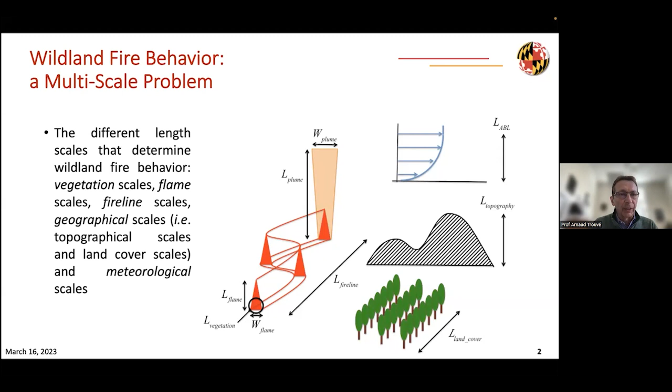So it's a multi-scale problem, and here I'm going to focus on the scales relevant to combustion engineering: the scales of the vegetation and the scale of the flame.

Computational modeling has the potential to describe physical phenomena at any of these scales, but typically, because of limited computer power, any given computational solver is specific to a certain range of scales. We differentiate between combustion solvers that resolve dynamics at the vegetation and flame scales, wildfire solvers that resolve dynamics at the fire line and geographical scales at kilometer size, and atmospheric boundary layer solvers that resolve dynamics at the mesoscales of the atmospheric boundary layer.

Here I'm going to focus on OpenFOAM as a combustion solver that looks at the problem at scales relevant to the vegetation and the flame, roughly speaking, meter scale.

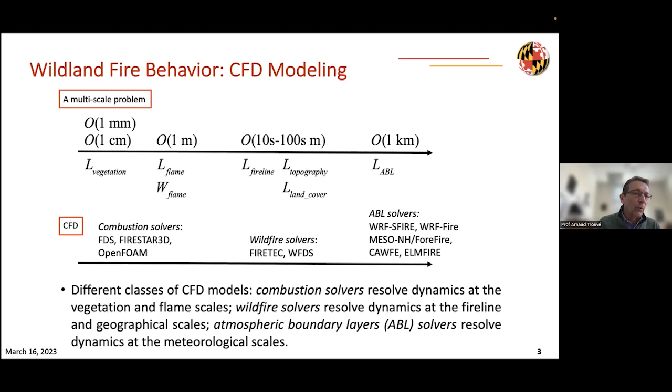As an introduction, I want to review the basic steps associated with flame spread physics. Flame spread can be understood as a repeated cycle of: first, heating of the unburned solid fuel; second, the production of flammable vapors as a result of thermal degradation taking place inside the solid vegetation biomass; and third, combustion of the flammable vapors in the flaming mode in the gas phase.

In this description, pyrolysis is the production of flammable vapors due to thermal degradation of solid fuel. Ignition describes either the start of pyrolysis or the start of combustion, but I'll come back to that topic in a few slides—basically these are the same.

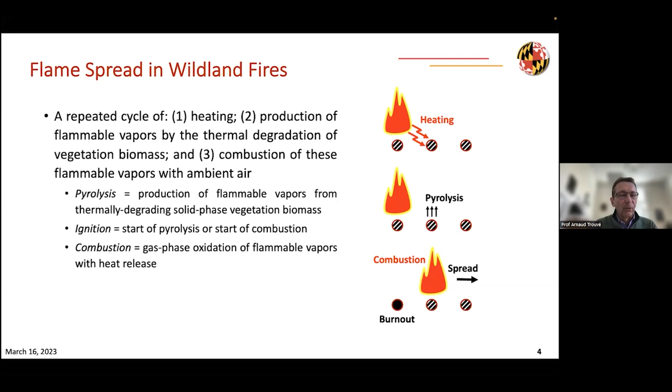Combustion usually means homogeneous exothermic oxidation of flammable vapors in the gas phase and in the presence of a flame. But actually, in the next slide, I'm going to indicate that the combustion process is more complex in wildland fires.

So we have basically two combustion modes. There is a flaming combustion mode that corresponds to homogeneous gas phase reaction and takes the form of a usual non-premixed, buoyancy-driven turbulent flame. But we also have, in addition to this, a non-flaming combustion mode called glowing combustion or smoldering combustion. That is the combustion mode we are familiar with because of burning fire logs in the fireplace or burning charcoal in a barbecue. It corresponds to heterogeneous solid-gas combustion where the fuel remains in solid form.

So in a wildland fire problem, we have both flaming and smoldering combustion that are relevant to the problem, and I will come back to that. That's one of the objectives of our simulations, to be able to describe both modes of combustion.

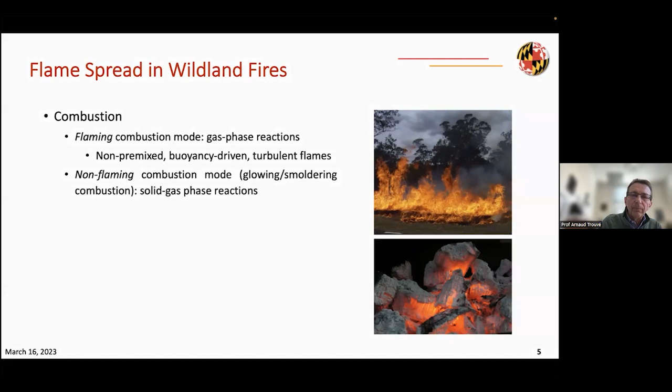So as I said, the first step of flame spread is a step in which the unburned solid vegetation is heated by the surrounding flame. This heating process takes place in the form of radiative heat transfer, convective heat transfer, or the transport of firebrands. Now, firebrands are of interest to this problem, but I'm going to stay away from that.

Firebrands designate the fact that small solid particles can break off from burning biomass. When they break off, if they are small enough, they can be transported by the fire plume and the ambient wind to a distant location and start secondary fires there. This is definitely a phenomenon responsible for fire spread under some circumstances, and is of interest to the community, but I will stay away from that problem here and focus on fire spread due to radiative or convective heat transfer.

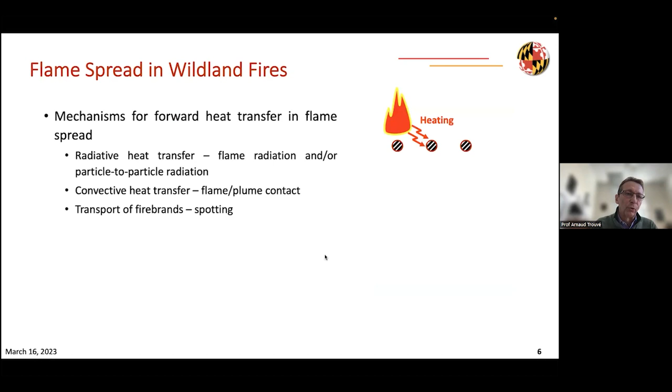So if we focus on fire spread due to radiative or convective heat transfer, one key quantity to understand the thermal loading of solid particle surfaces by surrounding hot gases is the expression you have here, where you have basically the heat flux to an assumed solid surface as a convective component and a radiative component.

The parameters of that heat flux are the local temperature of the gas, the convective heat transfer coefficient that depends on the local flow velocity as well as the local shape and dimension of the solid particle representing biomass vegetation, and the incoming radiative heat flux, called capital G here, which represents the heat loading due to radiation, also called irradiation. So all these external properties from the gas are relevant to understanding heat transfer to the solid particles, and I will come back to that.

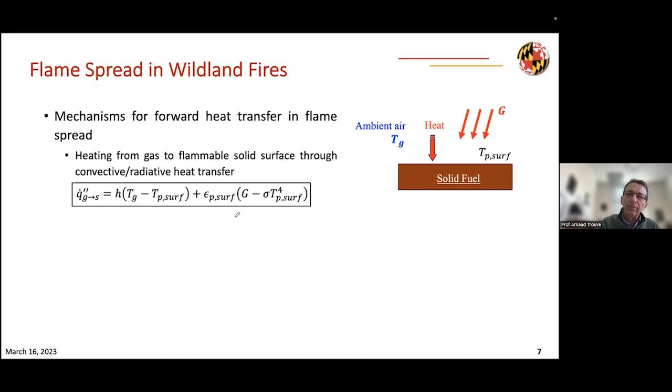So in the second step of a flame spread cycle, once the solid biomass fuel has been heated, it's going to start producing flammable vapors, and these flammable vapors are going to burn in the third step. So this is part of an ignition sequence.

This ignition sequence has several steps. The first step is the heating of the solid material. The second step is the start of pyrolysis, the production of flammable vapors. This is a phase change, and that phase change starts occurring at temperatures typically of about 300 degrees Celsius.

Then finally, these flammable vapors are going to mix with ambient air and start igniting through chemical reactions that take place in the gas phase. The details of that depend on the exact configuration, so I will not go into these details here. Finally, after ignition of the flammable vapors in the gas phase, you may have transition to a sustained diffusion flame around the biomass.

It turns out that many of these steps are relatively fast, and the rate-limiting step is the first one, the heating of the solid material. That explains why when we look at ignition, meaning ignition of a flame, we can really call it the start of pyrolysis. The rate-limiting step is the heating of the solid and the start of the phase change that takes place inside the solid particle.

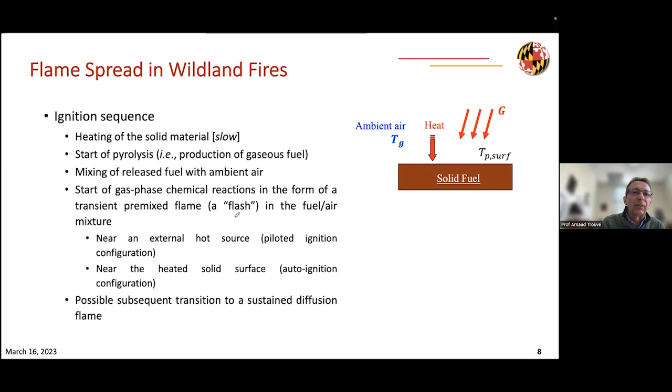Once you start pyrolyzing, the intensity of the pyrolysis process is a direct function of the intensity of what we call the thermal feedback, or the gas-to-particle heat transfer.

To understand what controls the rate of formation of flammable vapors, it is useful to do an analogy with evaporation of liquids. A simple model consists in writing that the fuel mass evaporation rate, in units of kilogram per second per meter square of exposed liquid surface area, can be written as the ratio of the net heat flux to the liquid surface divided by the heat of evaporation of the liquid.

Similarly, as a simple model to understand pyrolysis processes, we can write that the mass rate of evaporation of the flammable vapors produced by thermal degradation of a solid fuel is equal to the net heat flux coming from the gas phase to the solid phase, divided by the heat of pyrolysis, which is a semi-empirical quantity characterizing the heat required, in joules per kilogram of flammable vapors produced.

This model is not quantitatively accurate, so you need more elaborate pyrolysis models to describe the production of flammable vapors, but it is good enough to understand the physics showing that the rate of evaporation, or rate of gasification, or rate of pyrolysis for solid fuel is a direct function of the thermal feedback.

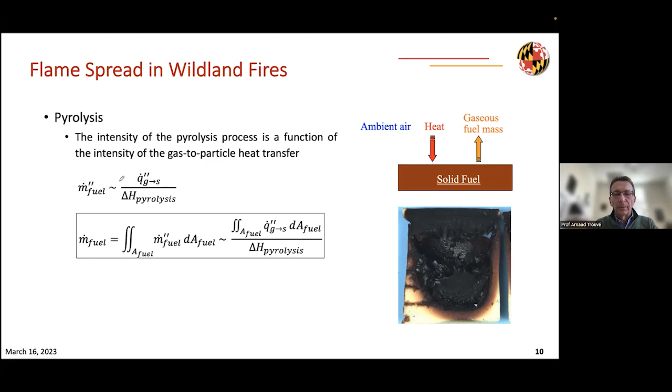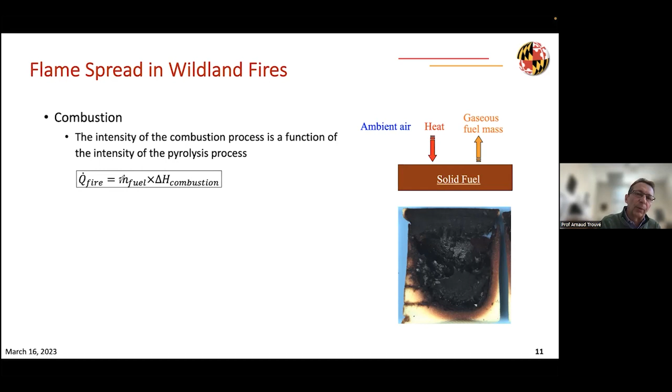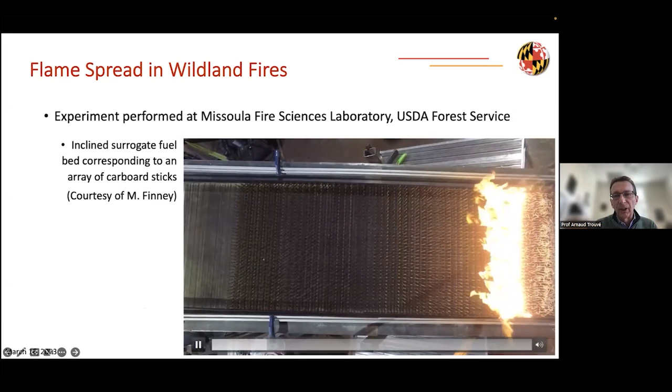To finish this introduction, I want to show a movie borrowed from the Missoula Fire Sciences Laboratory, courtesy of Dr. Finney, showing an experiment of flame spread over a surrogate fuel bed corresponding to an array of cardboard sticks. The flame propagates from right to left over these vertically oriented cardboard sticks arranged on an inclined table, and we have a top view showing the flame spreading from right to left. I'm going to use a couple of images from this movie.

If I stop the movie, I see the typical peak and trough structure of the flame, known to be the characteristic structure of these turbulent diffusion flames that are buoyancy driven and spread over a fuel bed. This peak and trough structure is a direct result of buoyant instabilities.

Let me continue the movie and stop here. Now you see very clearly the flaming region—this turbulent diffusion flame that propagates from right to left and consumes the unburned fuel. Behind it, you have glowing red regions that correspond to smoldering combustion, combustion without a flame. Finally, there's a region where the cardboard fuel is burned out and transformed into a small solid residue we call ash. So you see the importance of the flaming region and the smoldering region in these problems.

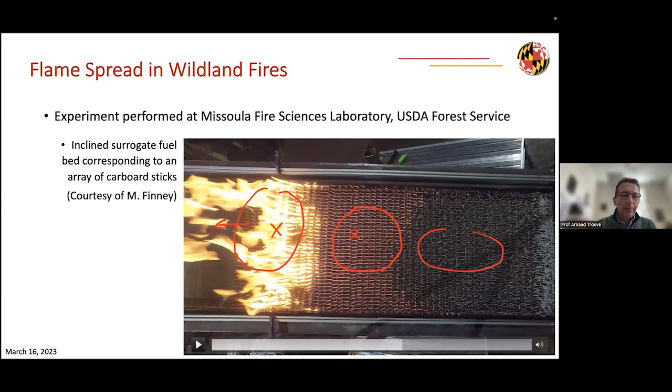Let me move on now, after this description of the physics of the problem, to a description of the numerical formulation and numerical approach used to solve this problem.

We use a Lagrangian-Eulerian approach that borrows from previous work, in particular the development of the multi-phase modeling formulation developed about two decades ago by a research group in Marseille, France, in particular Bernard Porterie, Dominique Morvan, and Jean-Louis Consalvi.

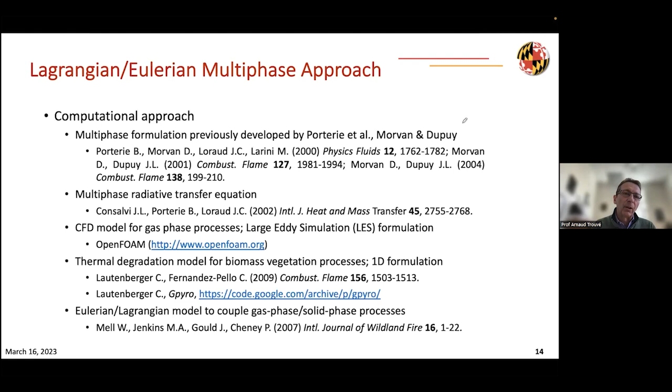Our modeling approach also borrows from the development of OpenFOAM as an open-access code, using the large eddy simulation low Mach number models available in the OpenFOAM library. It also borrows from the description of pyrolysis using models developed by Chris Lautenberger and Carlos Fernandez-Pello at UC Berkeley. Finally, our approach borrows from recent developments by the development team of FDS, the Fire Dynamics Simulator, developed at the National Institute of Standards and Technology in the US, and in particular the contribution by Rudy Mell for applying FDS to wildland fire spread problems.

Our formulation is a classical Lagrangian Eulerian approach. We solve for the gas phase processes in a Eulerian framework using large eddy simulation, and we also solve for solid phase processes using a simplified one-dimensional Lagrangian particle model that is viewed as a submodel on the LES grid.

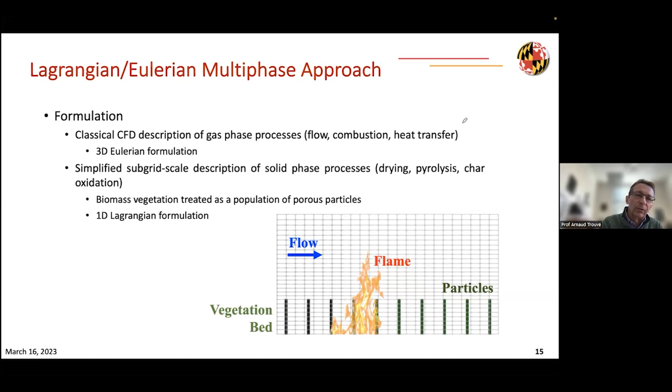Let me say a few words about the pyrolysis model that is key to this problem. We follow the work by Lautenberger and Fernandez-Pello, describing the thermal degradation process inside particles in the Lagrangian model through 4 reactions. We have a drying reaction representing evaporation of moisture into water vapor and a solid residue we call dry solid, then degradation of the solid into flammable fuel for the combustion process in the gas phase, producing a solid residue we call char.

We use 2 reactions for this degradation. The first is driven by temperature. The second is also driven by temperature but requires the presence of oxygen inside the particle. Finally, a 4th reaction describes the thermal degradation of the solid char in the presence of oxygen into combustion products and a solid residue we call ash. The first 2 reactions are endothermic, the third, oxidative pyrolysis, is slightly exothermic, and the 4th, char oxidation, is strongly exothermic.

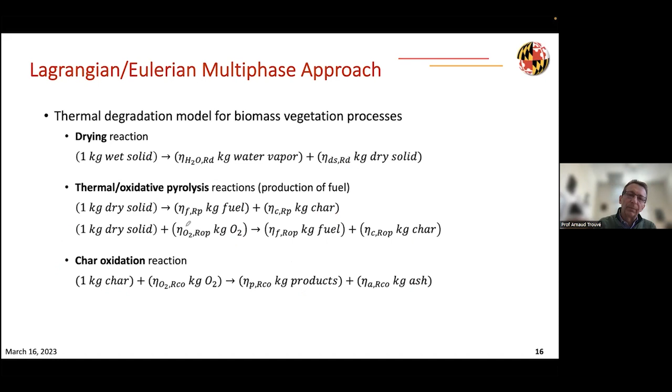Here I'll go briefly through the equations solved by the Lagrangian particle model in 1D. We use a porous medium formulation, so we have, for example, a conservation equation for the solid chemical species: the wet solid, the dry solid, the char, and the ash.

The mass conservation equations contain right-hand side terms representing the contribution of the drying reaction, the 2 pyrolysis reactions, and the char oxidation reaction. The mass reaction rates on the right-hand side are described using Arrhenius kinetics.

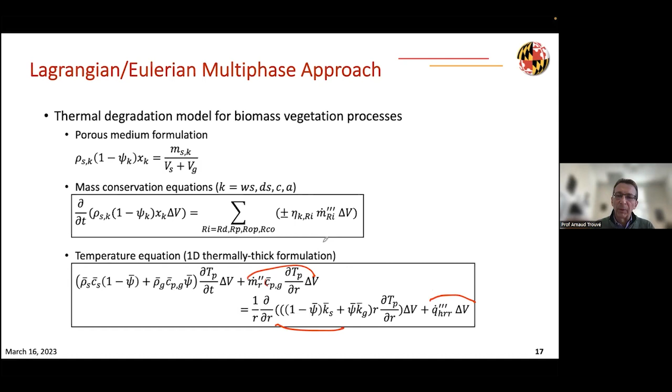Then we have an energy equation with a contribution of heat transport due to diffusion, a contribution representing heat transport by convection due to flow inside the particle, and a contribution from the different reactions, again 2 endothermic and 2 exothermic.

Because we have 2 reactions sensitive to the presence of oxygen, we need to track oxygen mass inside the particle, treated as a porous medium. So we have an equation for transport of oxygen mass, with a term representing diffusion of oxygen through the particle, a term representing convection of oxygen through the particle, and 2 terms representing consumption of oxygen due to the oxidative pyrolysis reaction or the char oxidation reaction.

The flow is described using Darcy's law, where the flow rate is proportional to a pressure gradient. Finally, the formulation is completed by a pressure equation that comes from total mass conservation and the ideal gas law, used to calculate the pressure profile.

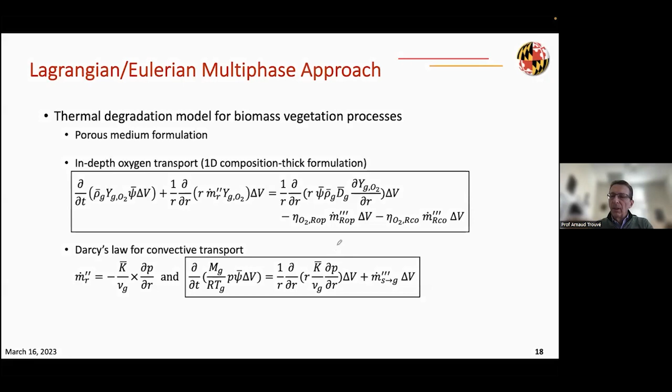The main point I want to make is that these models are quite elaborate and contain a lot of input parameters. Here you have thermal properties of the different solid chemical species: the wet solid, the dry solid, the char, and the ash. You also have physical properties like the porosity or permeability of these chemical species. Finally, at the bottom of this table, you have the Arrhenius parameters for the kinetics of the 4 reactions we are treating in this formulation.

So there are a lot of input parameters, and these parameters have to be calibrated against experimental data in a careful calibration study prior to going into a 1.5D spread model, and we'll come back to that in a few slides.

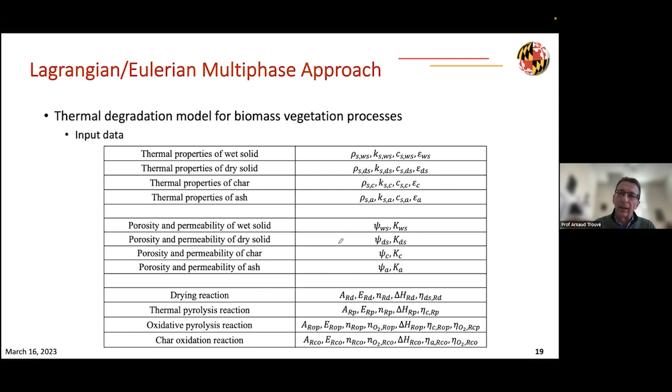The next few slides, because of lack of time, I will only go through very quickly. These are the LES equations enhanced with terms representing the coupling between the gas phase and solid phase processes. This is fairly classic.

The only thing I want to mention is that when you look at the mass conservation equations representing the added or lost mass to the solid particles, these terms have a beta S parameter representing the volume fraction of the solid in the bed. This is basically called the packing ratio in fire literature, defined as 1 minus the porosity of the vegetation bed. This is an important parameter in the dynamics of wind on fire spread.

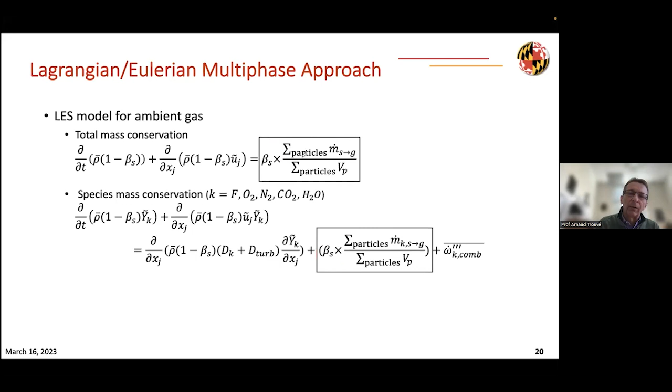We have a similar equation for conservation of momentum that looks at the effect of drag due to the presence of the solid particles. Finally, there is also an energy equation that looks at the heat lost to the particle to thermally heat and degrade it.

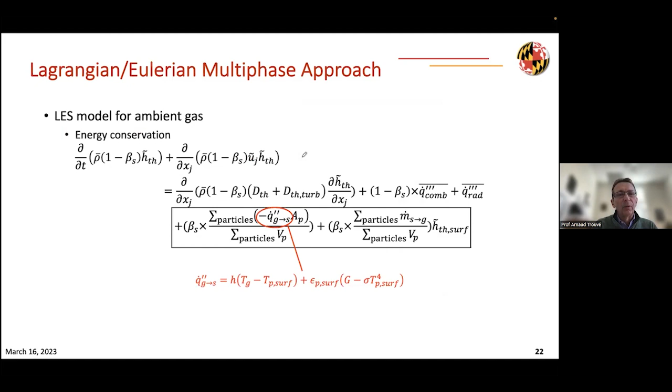For lack of time, I'm not going to talk much about the different models. The first model mentioned in this slide is the classical subgrid-scale turbulence model, and we borrow from the literature here, so nothing special.

I want to spend a minute on the combustion model. It's the eddy dissipation model, which comes from the 1970s and is a form of the eddy breakup model for diffusion combustion. This model uses a global combustion equation and assumes infinitely fast chemistry, and the volumetric rate of energy release is controlled by a turbulent timescale representing the mixing process between fuel and oxygen.

This model is relatively crude compared to the kind of models used by our colleagues in combustion science for engine applications, and it doesn't use any information on chemistry.

So I want to make two comments on this. This is justified by the fact that the goal of our simulation is to predict the heat release rate, not the detailed composition of the combustion products. Our objective is more limited, and therefore simpler models may be okay.

In addition, and that's my second comment, we don't know in fire situations the exact composition of the fuel. There's only an approximate representation of the composition of the flammable vapors coming out of solid particles due to pyrolysis, known only with partial accuracy. And we don't know the exact details of the oxidation chemical kinetics of this particular fuel. So detailed chemical models are either not available or not fully relevant to our applications, which explains why we use these simple models.

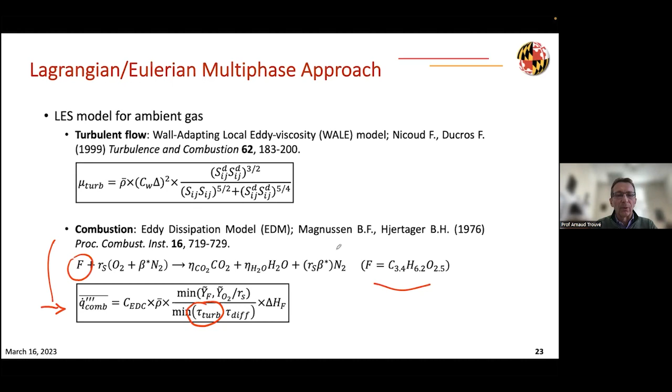One quick word on the modeling of radiation, which is key in fire dynamics. The variable used to treat radiation in a computational model is the radiation intensity I, which describes radiation energy per unit solid angle and per unit meter squared.

The values of the radiation intensity as a function of spatial coordinates and angular direction are obtained by solving the radiative transfer equation presented here. This equation has a contribution due to emission and absorption occurring in the gas phase, and also due to the effects of emission and absorption of radiation energy caused by the presence of particles.

I don't have time to go into the details. The second line here gives the energy term, in units of watts per cubic meter, present in the energy equation of the gas phase due to radiation gains and radiation losses.

The thing I want to mention is that these equations show two characteristic radiation length scales: one associated with radiation effects occurring in the gas phase, written as 1 over kappa, where kappa is the Planck mean absorption coefficient; and one associated with radiation effects due to the presence of solid particles, approximated as 4 over the packing ratio times sigma, the surface-to-volume ratio of the solid particle. This is essentially the diameter of the solid particles divided by the packing ratio.

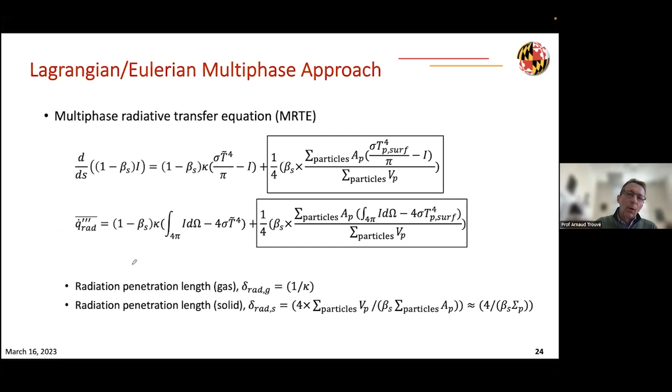Now, kappa, the Planck mean absorption coefficient, is a function of CO2 and H2O concentration, and also a function of soot volume fraction. That's actually a problem, because it means accurate modeling of radiation requires accurate modeling of soot, which is a difficult task, especially given that we have combustion models with no information on chemistry.

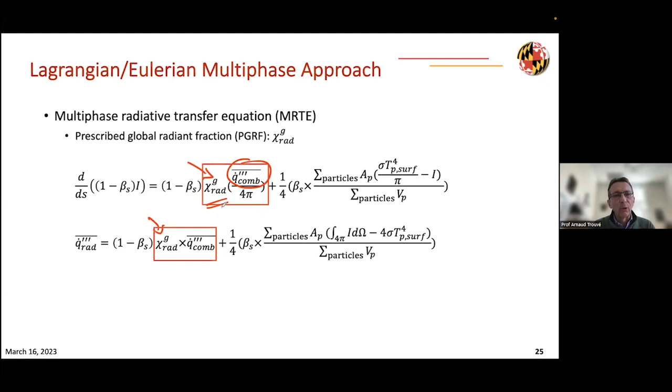So a usual simplification used in fire codes assumes that gas phase absorption can be neglected and that gas phase emission can be written as proportional to the combustion volumetric heat release rate, using a coefficient of proportionality, chi-rad, an empirical factor we call the radiative fraction. With this simplification, we use a prescribed global radiant fraction to describe radiation emission from the flame.

All right, so back to the coupling between gas phase and solid phase processes. The mass coming out from, especially the fuel mass coming out from the particles, is going to provide fuel required by the flaming combustion process, and the heat that goes from the gas phase to the solid phase basically sustains that flux.

This depends on the local gas temperature and the irradiation, also known as the incoming radiation heat flux. The incoming radiation heat flux is obtained as an integral of the radiation intensity over the 4 pi solid angle, and basically comes out from the calculation allowed by the radiative transfer equation. So the radiative transfer equation gives I, and then we can calculate G as an integral of I.

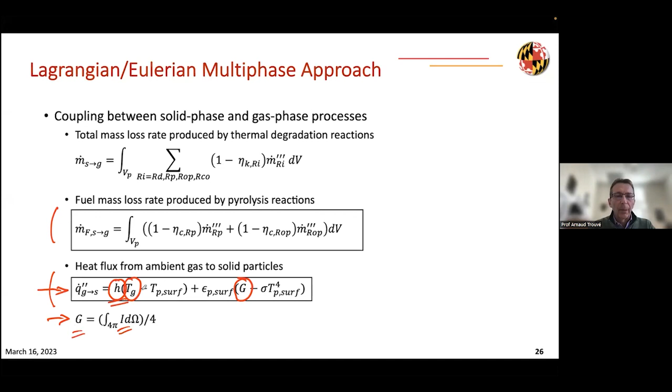So here I want to focus on the problem of determining H, the convective heat transfer coefficient. This is actually an important problem that is still unsolved. The convective heat transfer coefficient plays a dominant role in the spread of these flames. Unfortunately, we don't have a lot of information on this convective heat transfer coefficient.

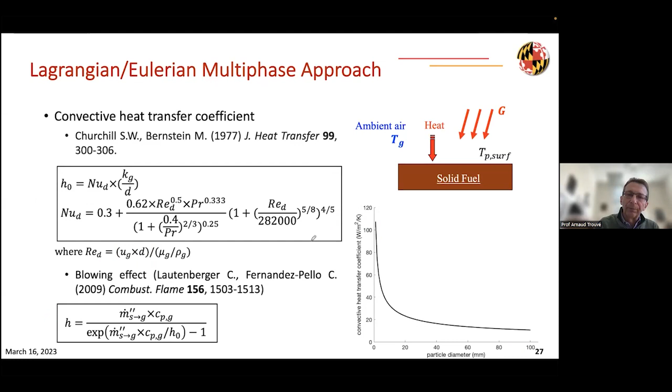In addition to H that characterizes transfer of heat, we have to look at the convective mass transfer coefficient, H mass, that characterizes the transport of oxygen mass to the particle. The oxidative pyrolysis reaction and the char oxidation reactions are very sensitive to and require the presence of oxygen, and very sensitive to the mass flux of oxygen that goes from the gas phase to the core of the solid particles, described by this parameter H mass. This convective mass transfer coefficient is directly related to the heat transfer coefficient using standard engineering practice.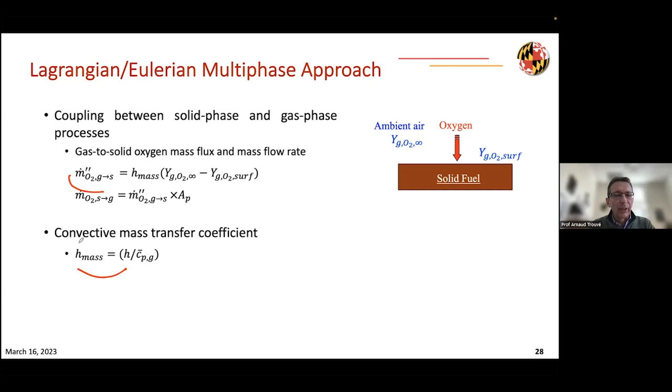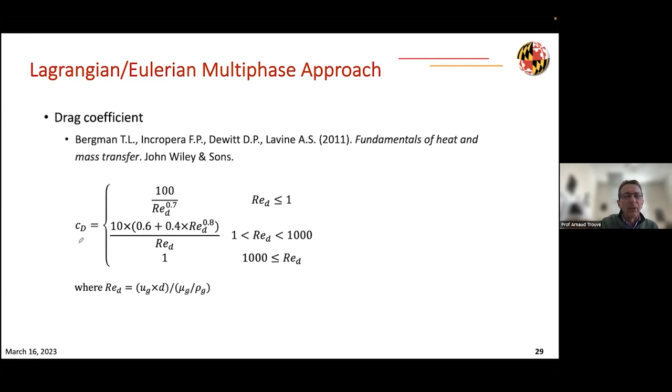There is also the need for a description of the drag coefficient, but that's more classical, and here it is less important, so I will not mention it more. All right, so that describes all the models that have to be put together to get to a simulation of flame spread in a wildland fire scenario.

So again, here we're going to look at a simplified configuration, a surrogate fuel bed that corresponds to vertically oriented cylindrical shape sticks of pine wood. This vegetation fuel bed basically is going to be characterized by the height of the vertical pine wood sticks, their diameter, as well as the packing ratio that describes how many of these wood sticks we have per unit meter square of ground surface.

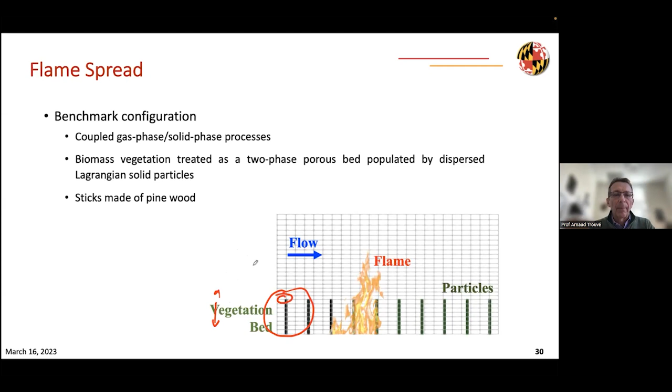Before we go to the results of the simulation, I want to indicate that we need to carefully calibrate the pyrolysis model we're using. This is a model available for pine wood, and we are showing calibration simulations against experimental data coming from microscale experiments known as thermogravimetric analysis experiments, TGA experiments.

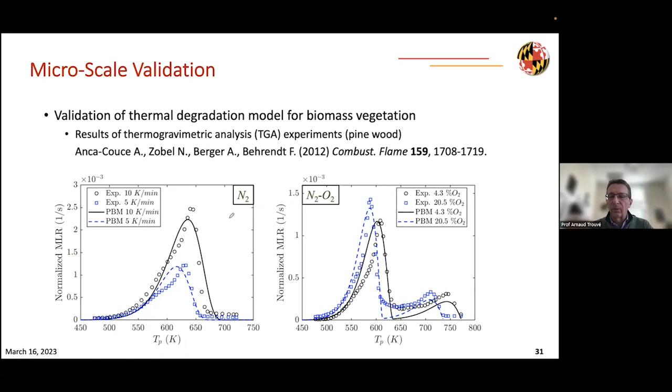Here you're looking at the variation of the mass loss rate as a function of controlled temperature in the experiments for thermally thin particles of pine wood. You are seeing comparison between lines, which are the models, and symbols, which are the experiments, for different atmospheres. On the left, the experiment conducted in pure nitrogen, and on the right, the same kind of experiment performed in a mixture of nitrogen and oxygen, so you can look at the effect of the presence of oxygen on thermal degradation.

This calibration also involves comparison with experimental data done at the bench scale. Here, cone calorimeter experiments correspond to thermally thick samples of pine wood that are exposed to fixed values of radiation heat flux, G, the incoming heat flux on the solid pine wood sample surface.

And here you see comparison again between simulation results and experimental data for different atmospheres: pure nitrogen, pure air, or a mixture of nitrogen and oxygen.

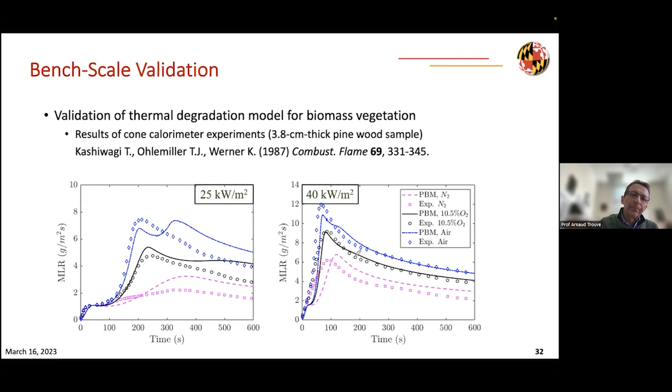The parameters in our simulation of our vegetation fuel bed are the particle mass density, the particle surface to volume ratio (in other words, the diameter of the solid particles present in the fuel bed), the fuel moisture content, the heat of combustion of the flammable vapors produced by the pyrolysis process, the height of the pine wood sticks, the packing ratio that describes the number of pine wood sticks per unit ground surface area, and finally the environmental conditions, the wind velocity. We are considering flat terrain here, so the angle of the slope is just 0.

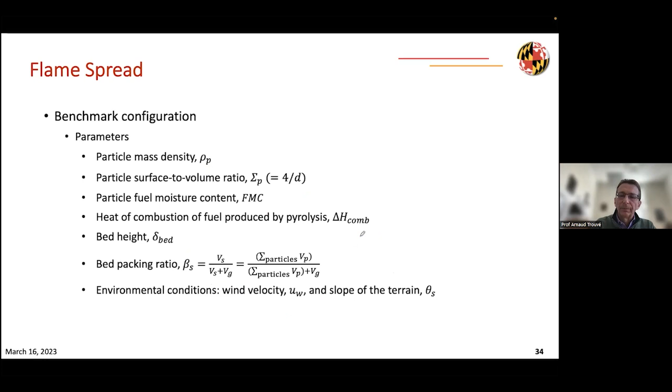Some important derived quantities are the bulk mass density of the fuel bed, which is basically the product of the packing ratio times the particle mass density (the mass density of pine wood). The solid mass load characterizes the mass of solid present per unit meter square of the ground surface, and is expressed as the bulk mass density of the vegetation bed times the height of the vegetation bed. Finally, an important parameter for combustion is the effective fuel mass load, in units of kilogram of fuel consumed per unit meter square of ground surface.

That is related to the solid mass load times two factors. One factor accounts for the fact that not all the mass of the solid is turned into fuel for the gas phase flaming combustion process, so you have the yields associated with water evaporation or with pyrolysis. The second factor contains more physics: the fuel consumption efficiency factor, or particle consumption efficiency factor, representing the fact that not all the solid fuel mass will be actually completely thermally degraded. The thermal degradation process may not be complete, and this factor accounts for this.

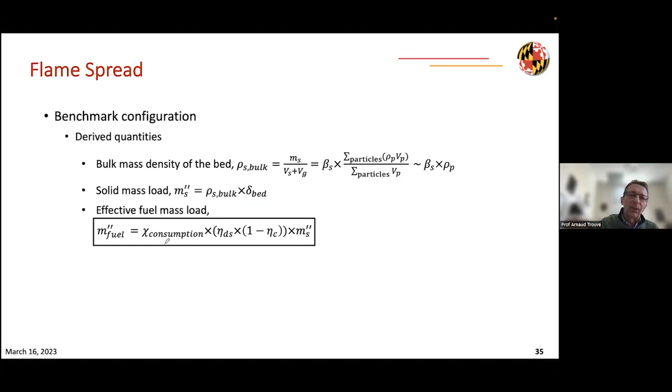I will go back to that and see it in the simulation. Before I present some representative simulation results, I want to say that the two main global parameters for flame spread are the heat release rate of the flame and the rate of spread of the flame in the direction of the wind.

You can show, using the Byram expression, that the fire intensity can be expressed as the effective fuel mass load times the rate of spread times the heat of combustion. This shows that heat release rate and rate of spread are about the same thing, but not quite, because the effective fuel mass load has a parameter built into it, presented in the previous slide: the particle consumption efficiency factor, which accounts for the fact that not all the particle mass will be consumed by the passing flame. So there is information showing that fire line intensity and rate of spread are related, but not exactly the same quantity.

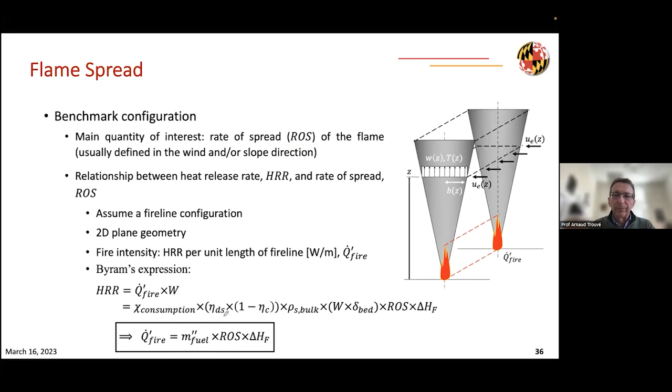So let me move on now to the numerical configuration. We have a domain that is 152 meters long, 40 meters deep, and 40 meters high. This is flat terrain. We assume in this representative simulation wind velocity at 2 meter elevation of 5 meters per second. We have a boundary layer profile, and we also introduce turbulent fluctuations at the inlet of our domain.

We are considering cylindrical shape vertical sticks of 2 millimeter diameter in the baseline configuration. These sticks are 0.4 meter high in the vertical direction. The packing ratio is 0.5%, and we use a prescribed global radiant fraction approach.

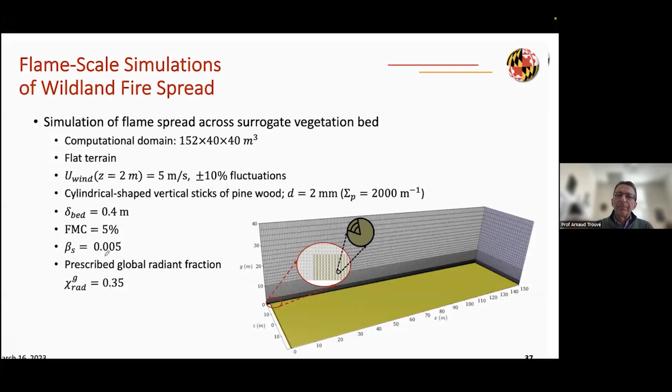A quick word about our choice of grid resolution, which is going to be 10 centimeters. We compare that resolution to the characteristic length scale of the problem. So we have the elevation of the fuel bed, 0.4 meter. We have the radiation penetration length scale, which is also 0.4 meter here. And we have the flame scales - the flame length, the flame height, and the flame depth - explained in this diagram. We will see when we look at the simulation results that these length scales are meter scale, typically above 1 meter.

That explains that our choice of grid resolution of 10 centimeters - 5 centimeters would be better - but in our baseline simulation we typically settle for 10 centimeters, which is marginal to resolve the radiation penetration length and the vegetation height, but is good enough to describe the flame geometry. We've done grid convergence studies that show there is not a lot of difference between 5 or 10 centimeter simulation.

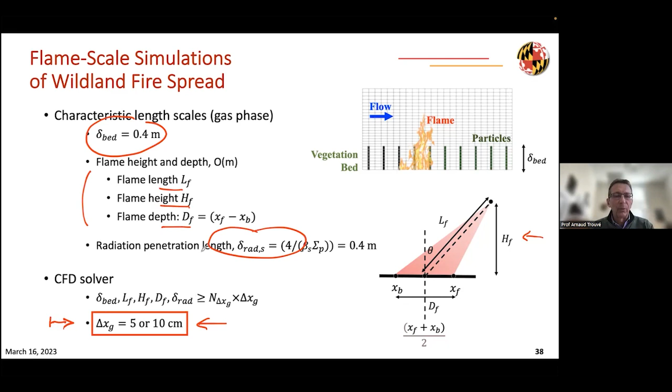I want also to say a word about the grid resolution required in the Lagrangian particle model. Here is a result of the Lagrangian particle model used as a standalone model. This model corresponds to a 10 millimeter diameter cylindrical particle heated during 1 minute at a level of 60 kilowatt per meter square incoming radiation heat flux. And the local velocity is 1 meter per second.

We see here the mass loss rate as a function of time, and we see two phases. The first phase corresponds basically to pyrolysis, and that phase is sustained by the external heat coming into the particle. The second phase corresponds to smoldering combustion that is self-sustained and continues even when the external heating stops. So you see in this particle response simulation a nice transition from flaming combustion to smoldering combustion.

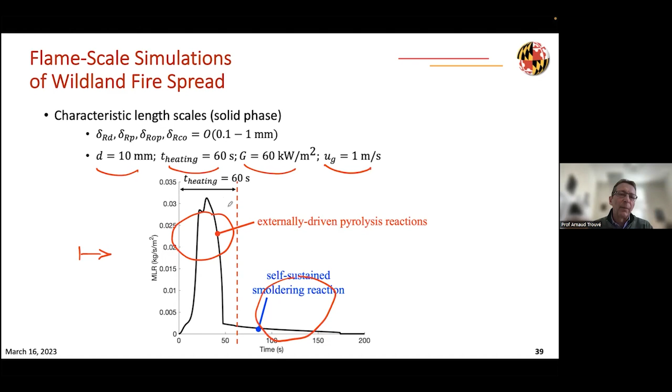If I look at two different snapshots of the details of the temperature profile on the left, or the volume fraction of char and ash profiles on the right, across the particle surface - 5 millimeter is on the right, and the particle core is on the left in these diagrams - you see the high temperatures achieved inside the solid particles, typically temperatures above 1000 K. You also see on the right the displacement of the char oxidation reaction from the surface region of the particle to the core region of the particle. So the char oxidation region is a region where char is transformed into ash.

Here on the left, we show the distribution of oxygen inside the porous particle. Oxygen is coming from the gas phase and is diffusing into the particle. You can see here that actually the char oxidation reaction is oxygen diffusion limited. There is no oxygen mass in the core of the particle. All the oxygen that diffuses into the particle is consumed by the char oxidation reaction. And on the right, you see the volumetric mass reaction rate of the char oxidation reaction.

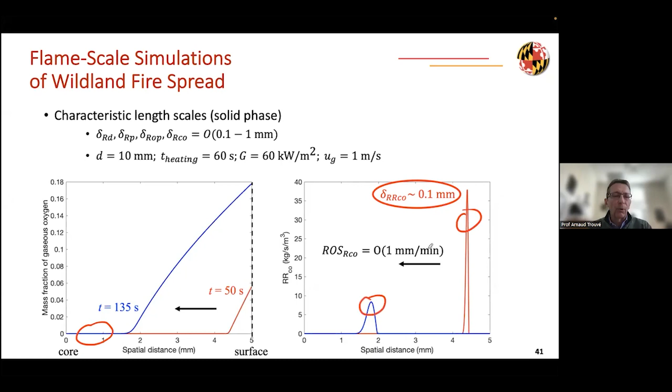I want to use this to say that the thickness of these reaction regions is quite thin, on the order of 0.1 millimeter. That explains why in our simulations we need a very fine grid inside the Lagrangian particle model. We use 25 micron resolution.

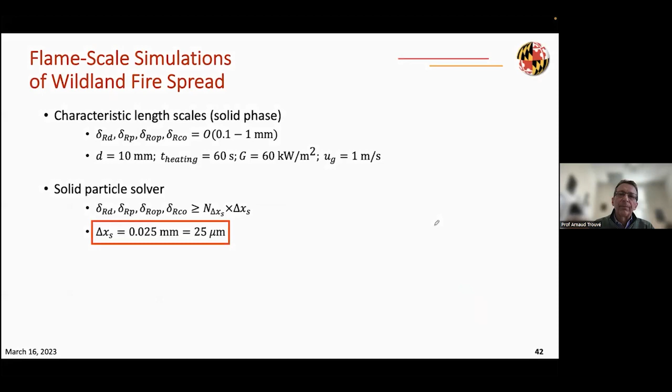Using a 10 centimeter resolution in the gas phase solver, we have about 7.4 million grid cells, 2.4 million particles. Again, our typical CPU cost here for 1 minute of simulation is about 25,000 hours. And we typically simulate this flame spread for 4 minutes. So roughly speaking, we have about 100,000 CPU hours in one simulation of these flame spread problems.

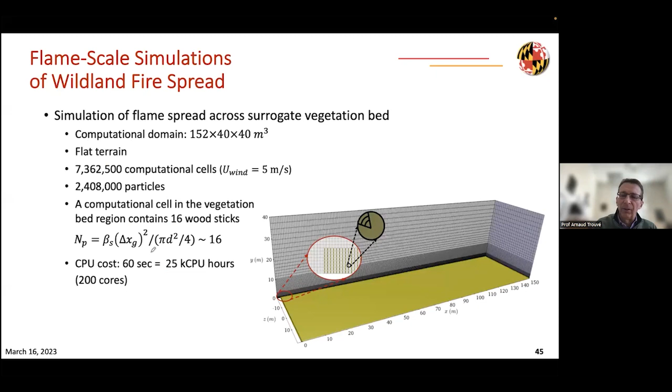So some preliminary results. Here we see first estimated rate of spread values coming from the well-established Rothermel model used in wildland fire literature. According to the Rothermel model, the rate of spread for our conditions should be on the order of 0.33 meters per second. We simulate 0.37 meters per second, which we think is adequate.

Empirical correlations for the fire line intensity predict a heat release rate of 3 megawatts per meter of length of fire line, and we simulate 3.3 megawatts per meter, which is again within 10% of the empirical value, which we think is adequate.

A quick comment is that this heat release rate, this fire line intensity, characterizes flaming combustion. If we add the contribution of smoldering combustion, we end up with an additional 1.84 megawatts per meter. So the total heat release is actually 5.1 megawatts per meter. The heat release that takes place inside the particles in a non-flaming mode accounts for about 36% of that total heat release.

If we look at the flame scales, we find that in our simulation, the flame height is on the order of 5.5 or 5.6 meters. The flame depth is on the order of 1.5 meters. And behind the flame, we have a smoldering region that is about 8 meters long. So the total depth of the zone where you have mass loss activity is close to 10 meters in this simulation, and that justifies the fact that 10 centimeter grid resolution is adequate to resolve these dynamics.

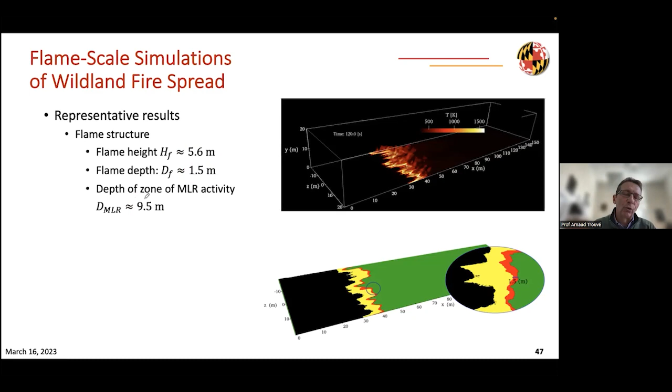So let me show some animations here of the simulation. Here we're looking at temperature isocontours in the gas phase and in the solid phase to identify the flame, and also the hot region where the particles are basically thermally degrading due to pyrolysis and smoldering.

These visualizations show the classical peak and trough structure of the flame that is a result of buoyant instabilities, and that has been observed experimentally.

Here I want to go into a little bit more detail and show a modified configuration where we have a small patch in the domain of particles that contain not only the 2 millimeter particles we have in our baseline configuration, but also larger particles. So we have mixtures of 2 and 10 millimeter particles, or 2 and 20 millimeter particles, in our simulations.

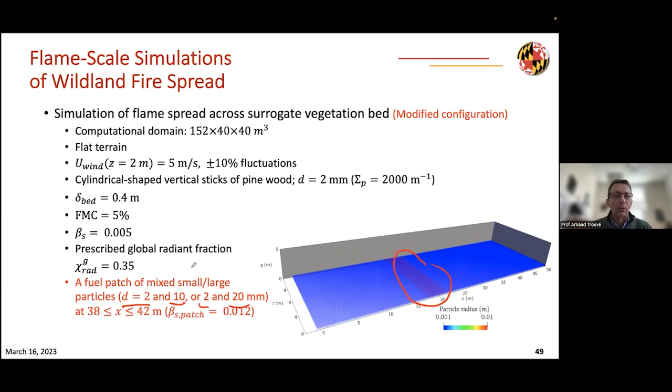This is done to show the sustained smoldering process even after the flame has gone through. Here the flame is propagating across a bed of 2 millimeter pine wood particles, and then it reaches larger particles that have a 10 millimeter diameter. The flame continues to spread, and the larger particles take a long time to complete the thermal degradation process through smoldering. So these simulations are a nice way to show the successful transition from flaming combustion to smoldering combustion in the case of these 10 millimeter particles.

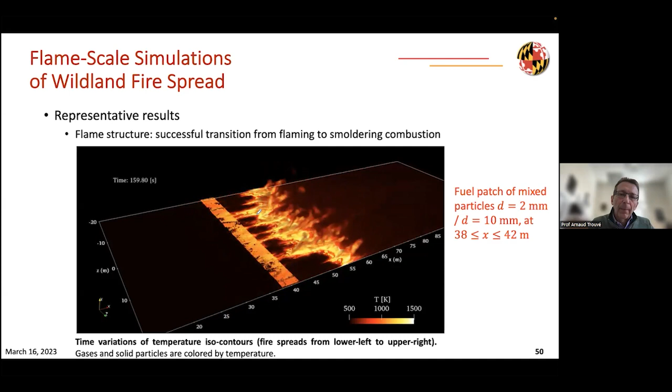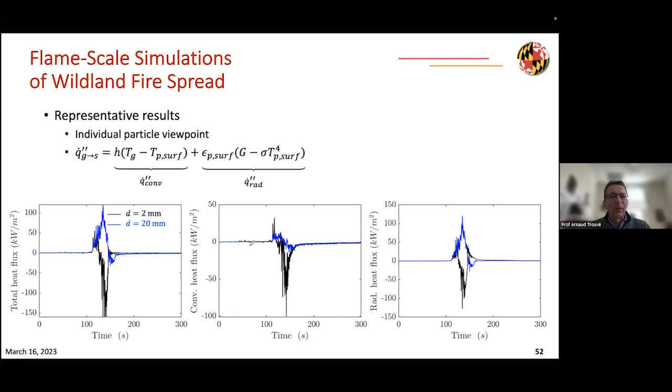If I look at the response of the particles, the first thing you want to study is the net heat flux. So here on the left is the total net heat flux, and the next two plots correspond to the convective contribution and radiative contribution to the net heat flux.

We see that these heat fluxes start from positive values that correspond to the heating process due to convective and radiative heat transfer, finally reaching negative values that correspond to a cooling phase. Once the particle has reached a very large temperature above 1000 K, the particle will be cooled by convection and radiation when it is exposed to a cooler environment after the flame has passed.

The main point I want to make is that the net heat flux is an attractive quantity that contains a lot of physics, but it's actually difficult to interpret because it has changing values from positive to negative and strongly time-dependent values. The net heat flux contains information on the heat loading through the temperature of the gas or the incoming radiative heat flux, but also contains information on the response of the particle through the presence of the temperature of the exposed surface.

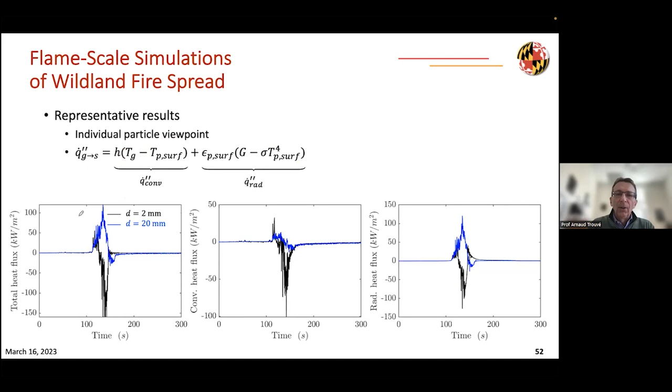So we are trying to differentiate the contribution of the external heating from the contribution of the particle response. We've introduced a new variable that we call the pseudo-incident heat flux, which looks at the part in the net heat flux that represents external quantities and doesn't depend on the particle surface. When we do this, we can clearly identify the values of external heating and the duration of external heating, on the order of 30 to 40 seconds here.

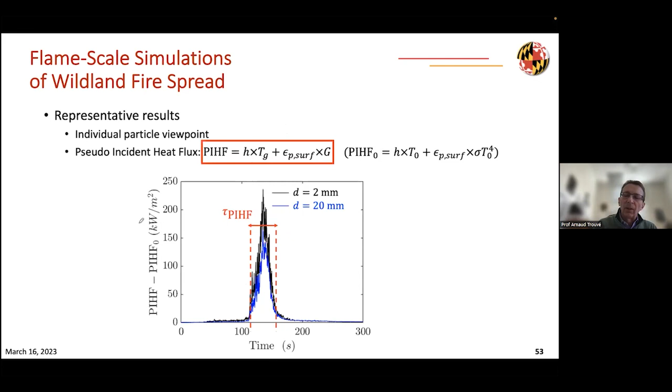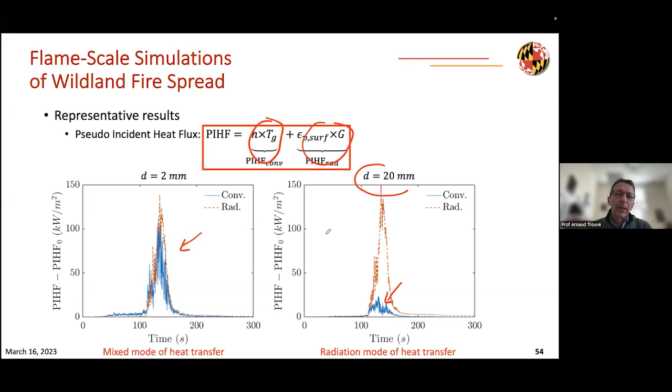This allows us to nicely identify when the particles are externally heated by the passage of the flame. This quantity can also be used to differentiate between the contribution of convection and radiation. We find that for small particles, the contribution of convection and radiation is about the same, so we have a mixed mode of heat transfer. Whereas for larger particles, the contribution of convection is very small and we are dominated by radiation. This is explained by the lower values of H that we find for larger particles, meaning the impact of convective heating is much reduced as particle size increases.

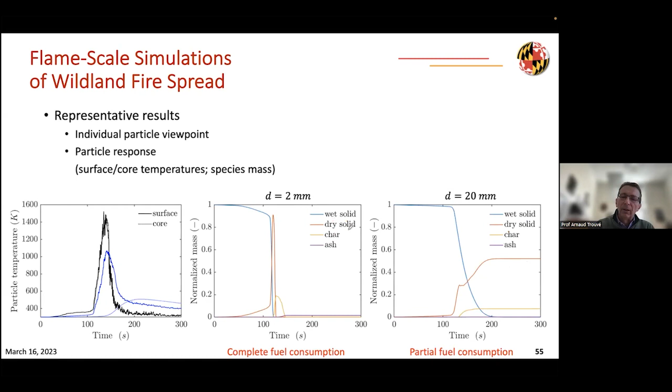We've compared different sizes of particles and find two types of particle behavior: complete fuel consumption for small particles with both flaming and sustained smoldering, and only partial fuel consumption for larger particles with no or limited smoldering. That's an important aspect of fire dynamics.

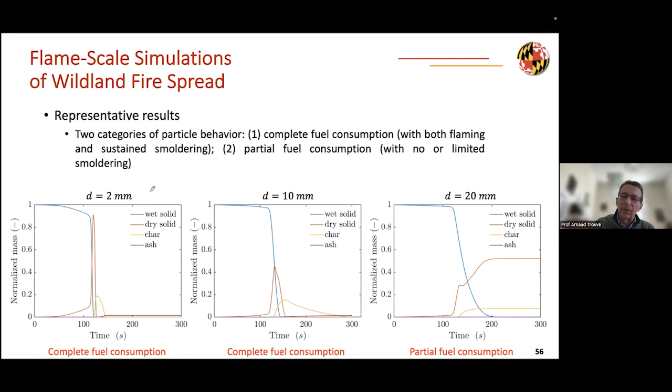My conclusion: we've developed an OpenFOAM-based computational capability for detailed simulation of wildland fire behavior at vegetation and flame scales. We solve for the thermal degradation process inside the solid vegetation at millimeter or even sub-millimeter scale, and we also solve for the gas phase processes at centimeter scale. We describe the exchanges of mass, momentum and heat associated with thermal degradation of the biomass, combustion, radiative and convective transfer, and turbulent flow, again all at vegetation and flame scales.

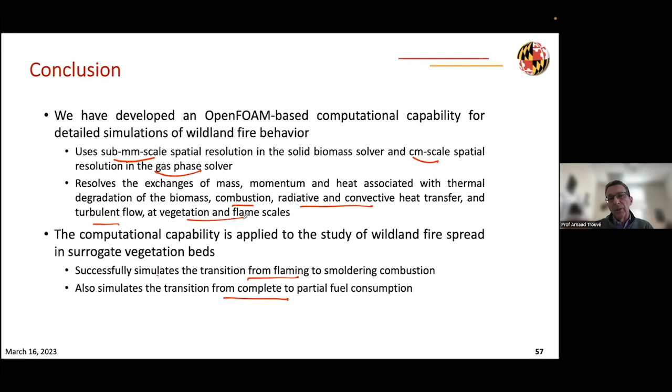So with this, thank you very much. I will stop here, and I'm open to answer any questions that you might have.